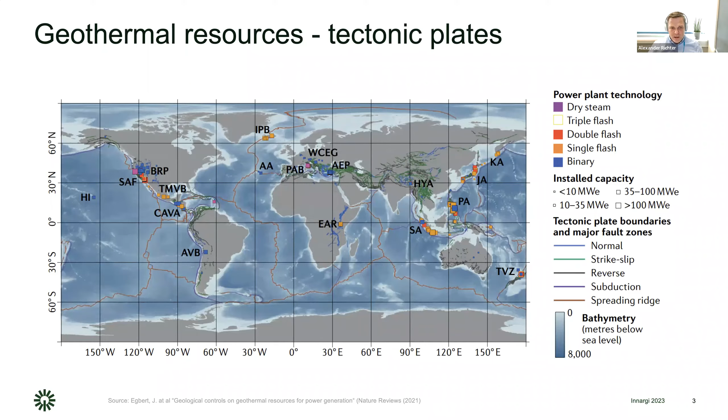And this is kind of where we are today. So these are the underlying hot zones of this world, these high temperature regions, looking at the installed capacity versus the opportunity. And this looks at traditional conventional geothermal power generation technologies, like flash and binary based, but it would not take into consideration a wider application of EGS or other advanced geothermal energy systems. But basically what this shows is that we have a huge amount of untapped geothermal potential. And that of course applies to high and low enthalpy resources.

And if you look at where we can find geothermal power plants, this is research done by us. It's basically all the geothermal power plants in the world today. And they give a clear indication of the tectonic settings along the tectonic lines. So if you take the whole west coast of the Americas going down to Chile, we see the East African rift, we see the Philippines, Indonesia, and Japan, going up into Russia. And we see some of the binary activities in Europe, for example in Turkey and in Central Europe, and of course Iceland at the border of the American plate and the Eurasian plate, and then of course the Azores in the middle of the Atlantic. So this is basically where we have a lot of the geothermal power plants as of today.

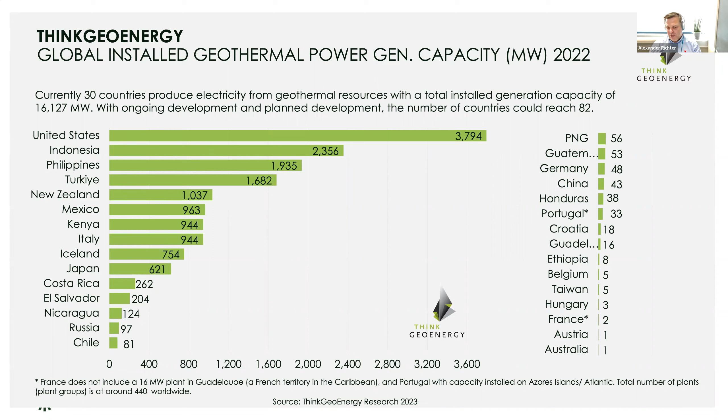But, and this is something that we continue to work on, with ongoing development and planned development in countries, the number of countries with geothermal power generation could actually reach 82. So from 30 or 29 countries today, we could reach about 82 countries that would produce geothermal power. And of course, the impact that could have on the visibility of geothermal across the world could be quite large.

And if we look at the development of geothermal here, I've been trying to get a clear picture of the annual additions of power generation, and we've only been able to provide this from 2006 on. And we see really different stages of development, lots of development in certain stages, and then basically dropping off again, seeing it burst up again, and so on and so forth. And this is of course something where we don't see the hockey stick growth that we see in other renewable energy technologies such as wind and solar. And of course, this is a concern for geothermal, particularly in how we are expanding, positioning ourselves, and being taken seriously.

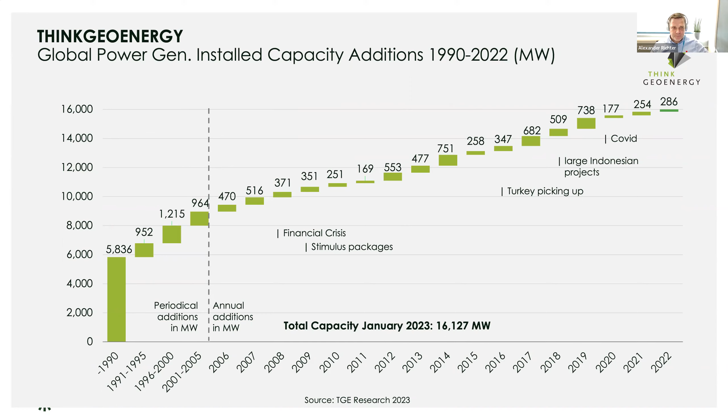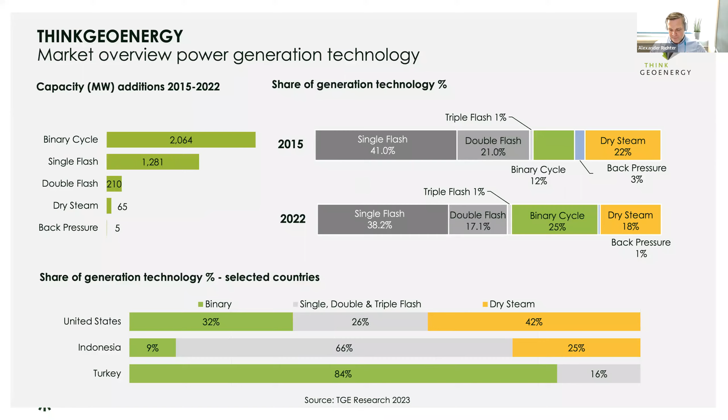And the context here is very interesting. It is essentially utilizing low temperature resources from naturally occurring hot springs, producing power without impacting the water flow for those geothermal baths. Because that is a big concern, in particular in Japan: if you were to drill for geothermal resources, you could essentially dry up the resource for the spa industry. And of course, nobody wants that.

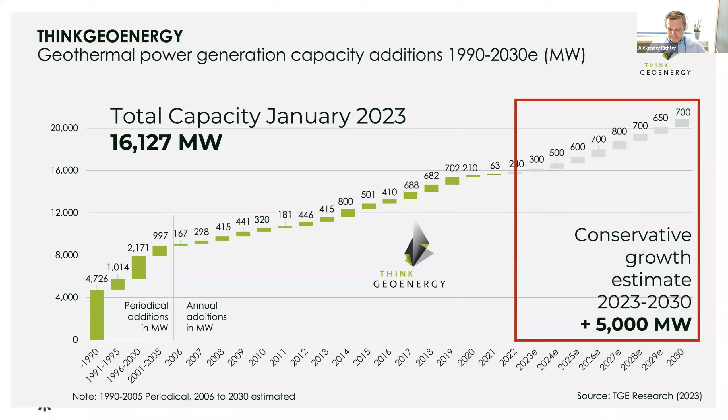But there's a huge impact here: we have to think of geothermal energy beyond electricity and the impact that geothermal can have for the energy transition. I think this is very clear, and this is probably the more important role for geothermal going forward. This is the impact that low enthalpy resources could provide, because they could expand geothermal energy use beyond the traditional geothermal countries along the tectonic plates.

And if we look at the energy demand in the European Union as an example here, the final demand in the 28 countries of the EU is around 14,000 terawatt hours of energy. And of that, the heating and cooling demand is about 44%.

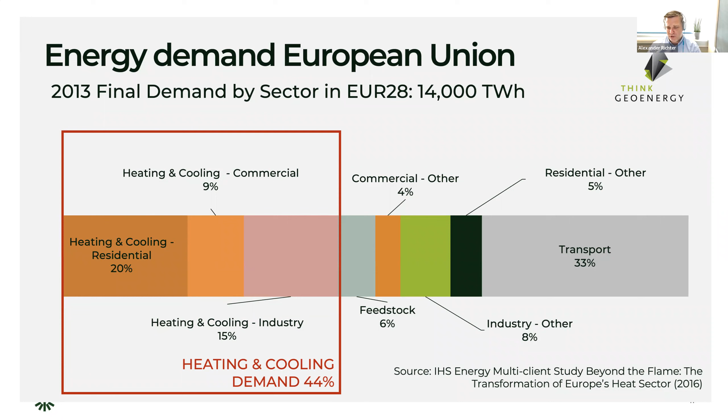So while our current effort on the energy transition lies primarily on electricity and transportation, one should not forget, and one cannot forget, the heating aspect of the energy market. And this is where, in particular, fossil fuels play today still an incredibly important role and a very crucial role, which is also providing certain challenges in the European energy market today.

So in this context, we need to talk about geothermal direct use. And of course, if it needs to be like the geothermal baths and hot springs in Japan or elsewhere in Europe, we have to understand what geothermal energy can provide in the context of utilizing heat that we have at hand directly.

And in this context, several years ago, I tried to provide an overview of the value proposition of geothermal in the context of renewable energy. And here we clearly disregard any fossil fuel source basis, but purely look at the renewable energy sources that are available today, how we use them and for what we can use them. And I think it is very clear here we have certain things to think about.

So the energy that we need as a population, we need cooling, we need electricity, and we need heat. And underlying, we also have to figure out a way of how we can store that energy. And with renewable energy resources, we have to look at what role these renewable energy sources can in fact play. So we look at biomass. What do we do with biomass? Biomass we burn, and with burning we create heat. And with the heat, we then produce electricity, heating, and with absorption chillers, also cooling.

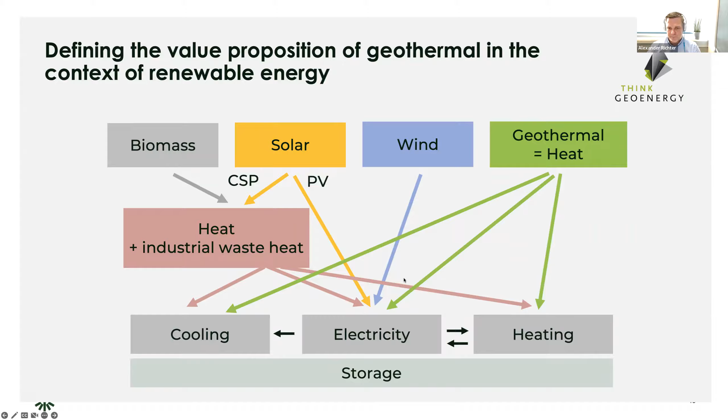Whoever has been in Beijing in the winter has smelled the coal dust in the air. Same experience in Poland and other Eastern European countries. So the coal dust and the impact it has on health is tremendous. So that's why China, for example, created a program with smoke-free cities, pushing geothermal energy as a source for heating to clean up the heating sector.

So this is a very important aspect, how to move away from fossil fuels, not only for the CO2 emissions, but also for the emissions that we generate in general. So all kinds of dust and smoke that you can feel. And of course, this has a huge impact on the health of people.

And then, of course, there's another aspect, and this is a very sad one, and it is about energy security. And I could have shown you a picture of people freezing in their offices in Europe with temperatures being pulled down to 19 degrees, but I think we should put this into relation and see what impact a war can have on a nation like Ukraine at the moment.

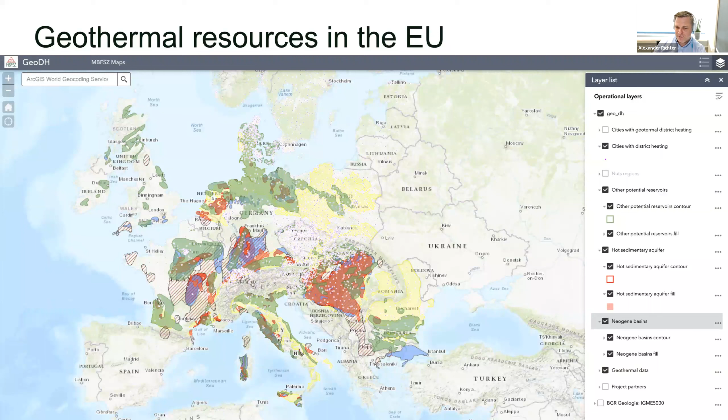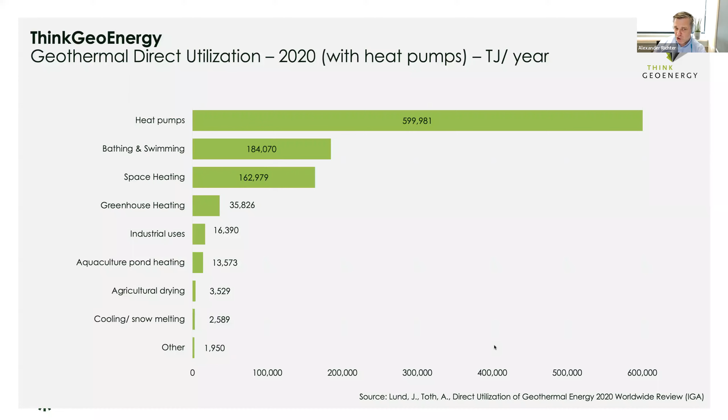And where do we utilize geothermal energy today for heat? So direct use applications. We use them for heat pumps today, which is the largest utilization of, let's say, a certain temperature in the ground. And then that is followed, of course, by bathing and swimming, space heating, and so on. If we disregard heat pumps, which are more shallow, this is the picture that we see today with regards to the utilization of geothermal energy.

Bathing and swimming is still the largest utilization of geothermal, followed by space heating. So here, for example, district heating or heating of buildings, greenhouse heating, industrial uses, heating of aquaculture, so fish farming, but also drying of agricultural products and snow melting. So these are basically utilizations of geothermal for direct use today. And they are providing a great opportunity and a fantastic growth opportunity as well.

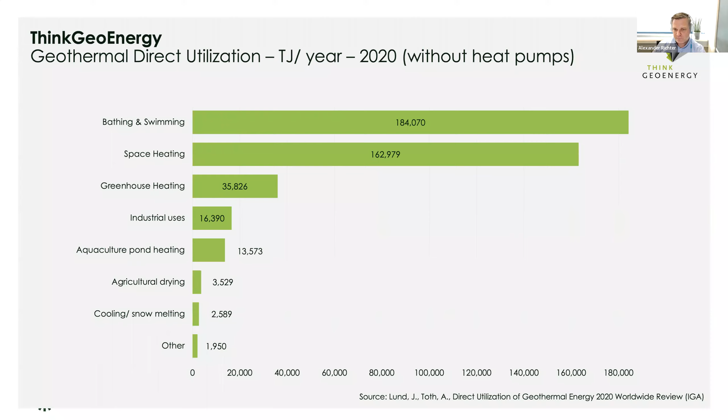So here, if we look at the growth that we've seen in geothermal direct use, here without the heat pumps, the change between 2000 and 2020, here is the growth that we've seen in these different categories. So bathing, swimming, and space heating, pushing ahead with the geothermal energy use. And we see that this will increase even further by 2030. Our estimate is that from 2020 to 2030, it will grow by another 212%.

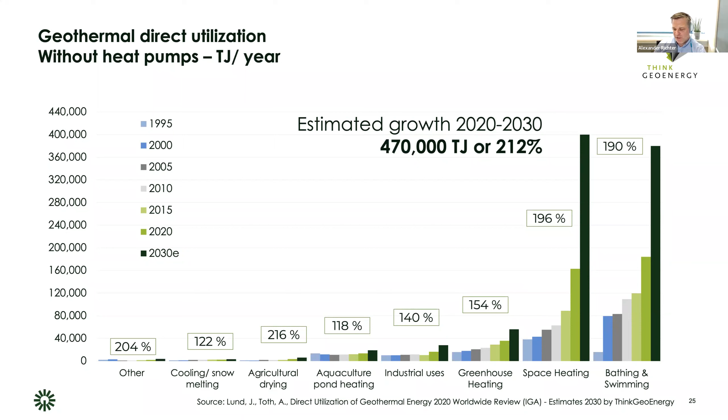And that might be just the beginning, because we're seeing an increased interest in the replacement of fossil fuel heating applications with renewable energy sources. And if we look at the top geothermal countries here for direct use, China is by far the leader. So China is utilizing geothermal the most for heat, followed by Turkey, Japan, Iceland, Hungary, and then others. So clearly there's room for growth in different countries, and with everything that's going on today, we believe that this will expand dramatically going forward.

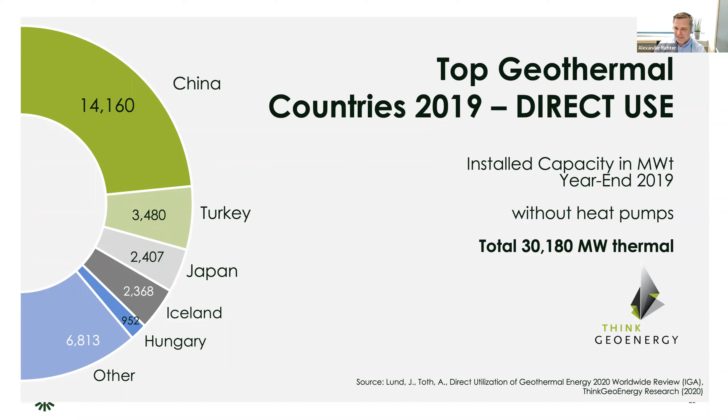So today, Asia and Europe are the largest regions with regards to direct use utilization. As I said, in Asia, it's mostly, if not all, China. And in Europe, it's mostly Turkey and the rest of Europe. And the rest of the countries are clearly behind. And of course, the heat demand is different in different countries. But we see, for example, in Africa and other locations that heating for greenhouses is something that we will see in areas being developed there.

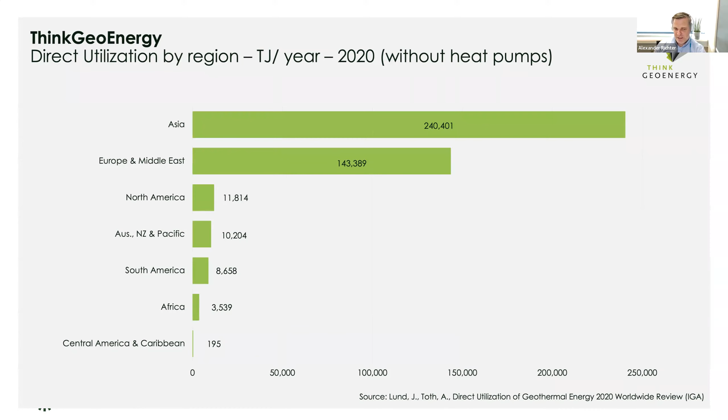And that brings me to the technology overview of geothermal and what are the current developments in that regard. This is where we see an increasing broadening of the technologies in the utilization of geothermal energy today. So from the traditional heat pump, shallow closed loop systems, utilizing low temperatures in the ground of everything between 7 and 15, 20 degrees, to really targeting supercritical deep geothermal.

For example, the Iceland Deep Drilling Project in Iceland, targeting temperatures of 300 degrees Celsius and more, with the plan to utilize this higher energy density from those higher temperatures, thereby increasing the energy output per well, and thereby also changing the costs of geothermal power generation development.

And of course, there's a whole load of different technologies in between. We have these deep closed loop systems where you basically drill some kind of closed loop system that is trying to extract the temperature in areas that don't have the hydrothermal resources. So for example, drilling into granite, but still extracting the heat. So that is being developed and test projects are being done.

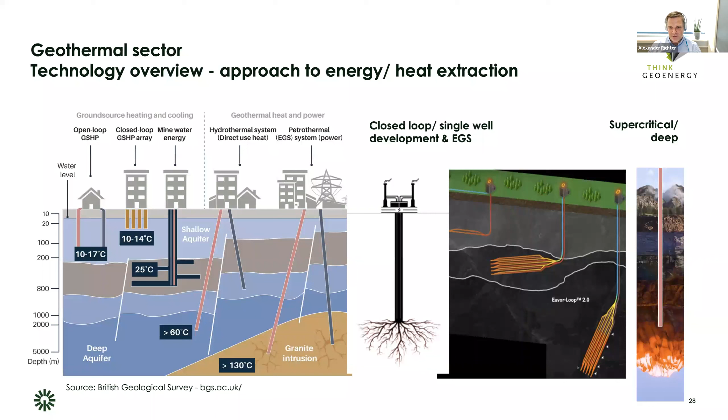And then an ultra deep heat exchange system developed in Espoo, close to Helsinki, where a company drilled 6,000 to 7,000 meters into granite and is trying to extract the heat there for the heating system. And furthermore, the city is also planning a heat storage facility utilizing rock caverns in the ground to store heat over the summer to be utilized in the winter.

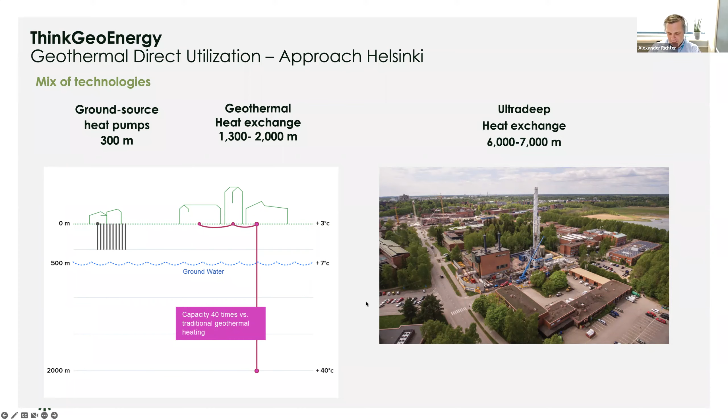So I would say that we as a sector are moving more and more from a purely geothermal sector to one that is increasingly becoming a geoenergy market and sector, and thereby providing a broader utilization of the experience, know-how, and education of everyone working in the oil and gas and extracting technologies. So that's definitely what we see is happening and providing great opportunities going into the future.

And we see a lot of development. As I said, we have a lot of geothermal development happening in the context of heat demand. So here, for example, a good example is the greenhouse sector in the Netherlands, a sector that needs heat for the greenhouses. And here a lot of greenhouse growers actually have joined forces and developed geothermal for their greenhouse operations, because energy prices became more and more expensive.

And those that have managed to successfully drill for geothermal, utilizing geothermal, today have stable energy prices, instead of those that still depend on gas or utilizing the heat from gas-fired power plants for heating, because the cost has increased so dramatically. And of course, that makes cost for food production more expensive, and with that, also the food prices for the consumer. So of course, this is a big impact that it has already had.

We see an increasing combined utilization of geothermal for heat and power generation. Good examples here are these combined heat and power plants in Bavaria in Germany, where the plant produces electricity from the higher temperature it generates from the ground. But after the power generation, the water is still warm enough to be fed into the local district heating network. And of course, this is a great opportunity also for the developer, because it provides double income streams.

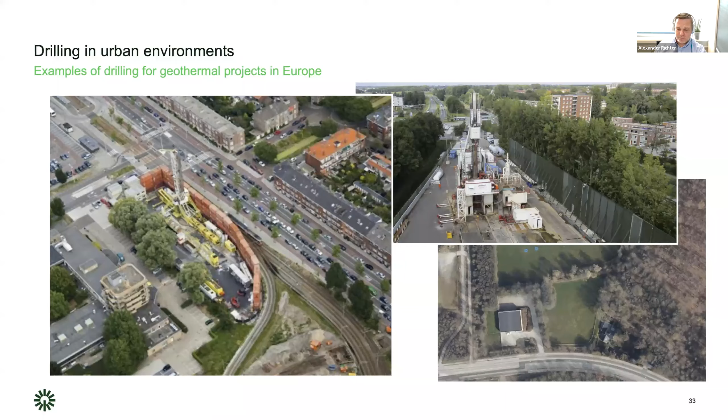And our idea is then, with these local drillings, to integrate the heating plants within the city so that they are not appearing too industrial to fit into the urban settings. So that is changing completely how you implement geothermal into urban areas.

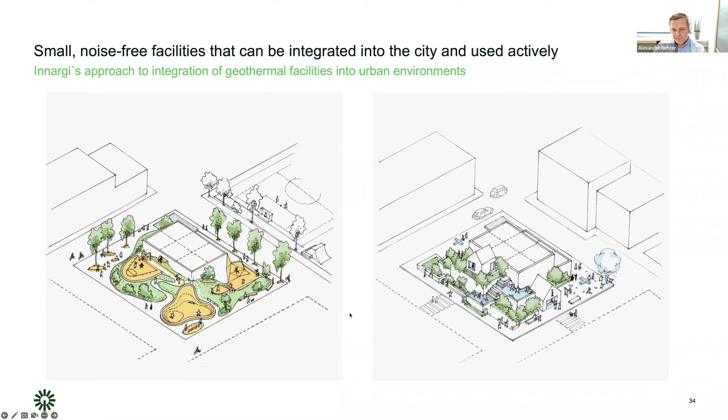And as part of the presentation, I was asked to look into the repurposing of oil and gas wells. This has been a topic that has been discussed a lot in the geothermal world and the opportunities it provides, but there are also a large number of challenges. And the question, as I've indicated earlier, is where are those oil wells? How economically can you utilize them? And how and where do you produce the energy that you extract from the ground?

A lot of these oil wells are based in remote areas. So you have to figure out a way of how to generate energy and in what form. If it's heat, it's very difficult to transport heat. So you would need big pipelines, etc., and that can be quite costly. With electricity, it might be less costly, but it's still costly to put transmission infrastructure. So there are a lot of aspects that are important when you look at repurposing oil and gas wells. But we are seeing a continued increased interest, but also development.

And with that, I want to touch a little bit on a study that my colleagues at ThinkGeoEnergy did here looking at all the oil and gas wells that have been drilled in the province of Alberta. They provided a dashboard looking into which of those wells can be utilized. So they looked at these 600,000 wells and estimated that about 60,000 wells have a potential for geothermal production. For power generation, only about 500 wells, and of course that depends on the temperature that you find. Industrial heat, but more so direct heat, with about 53,000 wells that can be utilized for that.